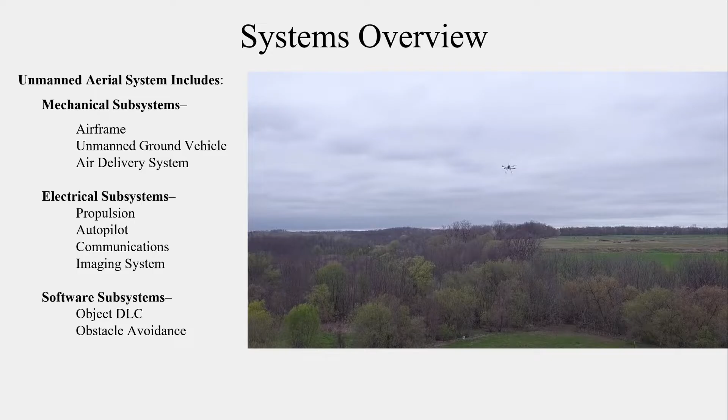For this year's competition, our team chose to create a large XH hybrid frame quadcopter with high-efficiency motors to ensure that we would have enough flight time to complete all mission objectives and land with a power reserve. Our final UAS has a thrust-to-weight ratio of 2.5 to 1 with all systems attached.

For our air delivery, our team created a controlled drop system in order to safely lower the unmanned ground vehicle and payload to the ground. This system used a DC motor and a gearbox controlled by an Arduino Uno to lower the vehicle using a high-strength fishing line.

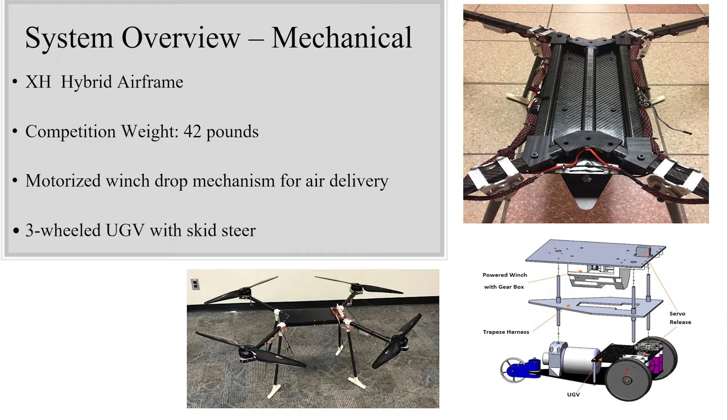For the UGV, our team created a 3-wheeled car that employs differential steering. With this setup, our UGV was able to make precise turns while maintaining a weight within the 48-ounce limit.

On our UAS, there are multiple electrical components needed for proper operation. Our propulsion system uses 4 Tattu 16 amp-hour batteries, outputting 44 volts with a capacity of 32 amp-hours.

This configuration will allow our drone to have a maximum flight time of 45 minutes. The system also uses 4 100 kV motors using 30-inch propellers. The total thrust output of the propulsion system is 93.4 pounds.

We will be using a 2-axis gimbal with a Sony a6000 to take stabilized pictures of ground targets from the UAV. A Ubiquiti Bullet M5 is used on the UAS to communicate images down to the base station.

For telemetry data, a pair of RFD900X radios are used to transmit UAS flight data to the base station. Finally, an FrSky transmitter and receiver are used for the safety pilot controls.

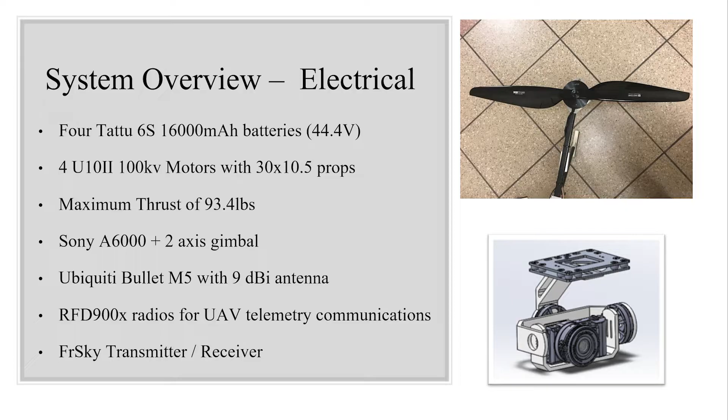This year's Object DLC system is a fine-tuned version of last year's system. Once the images have been received from the aircraft, they are manually classified and submitted to the judge's server using our team's custom web application, codenamed Commander.

The objects are also localized based on the drone's heading relative to north and the target's distance from the center of the image. The obstacle avoidance system uses a ray tracing method processed by an onboard computer to accurately and efficiently plan an avoidance path around obstacles.

Efficiently plan an avoidance path around obstacles. Additionally, users can manually manipulate the flight path if needed before flight.

For our planned mission demonstration tasks, we will be attempting all tasks except autonomous image submission. We are very confident that our system will capture all waypoints during autonomous flight. We are also very confident that our system will successfully complete a payload drop and an autonomous UGV drive.

For our obstacle avoidance system, we are confident that the system will avoid 75% of all obstacles. We will also be attempting manual object DLC and are confident that our system will capture at least 12 of the ground targets.

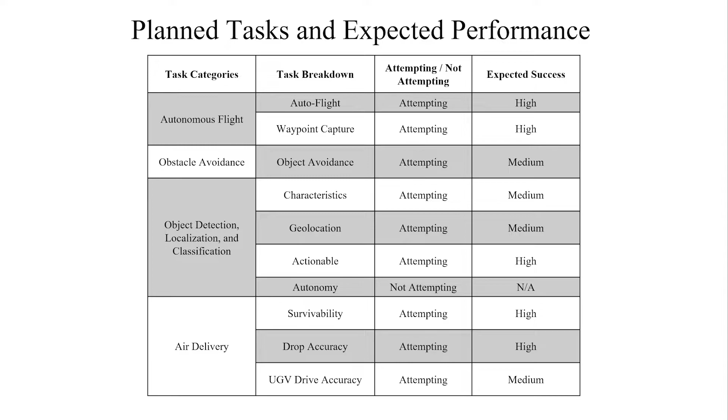To test the performance of the systems on our UAS, our team conducted strength tests and stress simulations on all structural components. Furthermore, all communication systems were range tested to ensure proper operation at long distances.

Before being implemented on our UAS, all software systems were code tested and then tested using our prototype drone. This allowed for debugging before implementation on our main system. Before implementation, all physical systems are prototyped and tested to ensure functionality.

Once the system was airborne, our team used the auto-tune feature in Mission Planner to PID tune the autopilot. After the tuning process was complete, several manual speed tests were conducted to determine if our calculations for optimal flying speed matched with actual data.

From these tests and our calculations, we determined that the optimal flying speed for autonomous flight was 21 miles per hour.

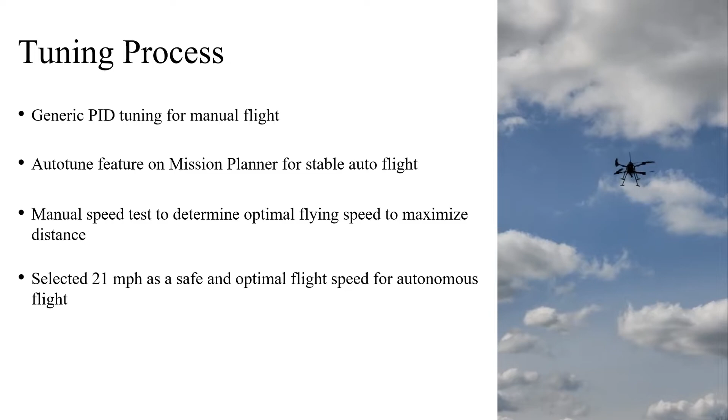For developmental testing of our autonomous flight system, our team conducted 37 autonomous flights using the Pixhawk 2.1 flight controller and HERE2 GNSS GPS on our competition platform.

The autonomous flight system performed well for a large majority of the flights, causing the safety pilot to only take over for 5 of the missions, with the majority of takeovers occurring early in testing. This resulted in an average of 34 seconds of manual flight per autonomous flight.

On the Big Flying Lilac platform, 37 autonomous flights were conducted, with 6 being full mission tests, 10 being air delivery drops, 15 being waypoint capture specific, and 6 specifically to test the obstacle avoidance system.

This resulted in 193 waypoints being attempted, with 187 being hit within 7 feet.

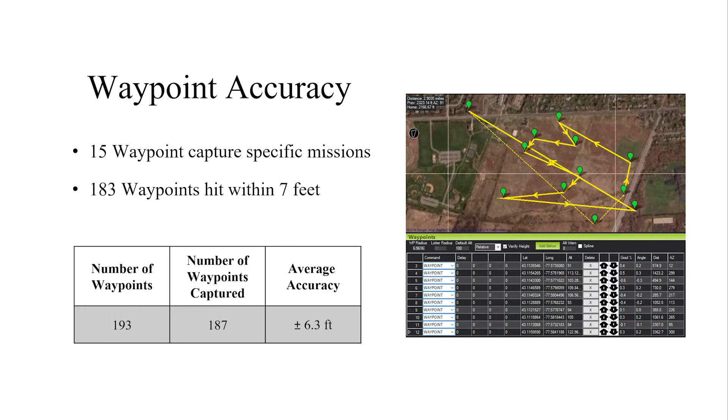For each of the 6 obstacle avoidance specific missions that were conducted, each mission contained 2 obstacles. Additionally, the full mission tests included 4 obstacles each. The total number of obstacles tested against was 36, and our UAS had an avoidance success rate of 77.7%.

To maximize image quality, multiple camera settings were tested while flying the UAS at the cruise speed of 21 miles per hour and at an altitude of 150 feet. The final settings chosen were 1/400th shutter speed, f4 aperture, and ISO 100. After processing the images, the average resolution of the ground targets was measured at 6,800 square pixels.

Since we are not attempting autonomy in the 2019 competition, we instead tested our manual DLC system by feeding images to users who then manually identify and classify ground targets. After initial training, all users were able to operate the manual system with a high success rate.

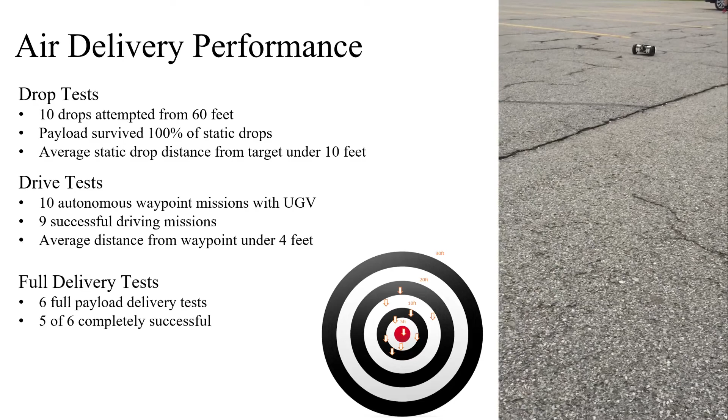For our air delivery system, we broke our testing down into 3 phases: drop tests, driving tests, and full payload delivery tests. We first conducted 10 static drops from 60 feet to test the survivability of our payload. Out of the 10 drops, our payload survived all of the landings.

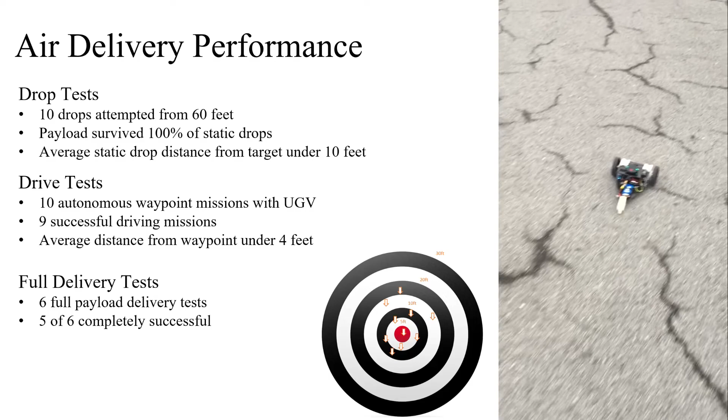We then conducted 10 autonomous driving tests to ensure the accurate waypoint capture of our UGV. Out of the tests, we successfully reached the final destination 9 times with an average distance from the destination of 4 feet. Finally, we conducted 6 full payload delivery missions.

Out of the 6, we were able to land the payload with full success and were able to drive to the target destination 5 times. For each of the full mission tests, our payload landed within 10 feet of the drop location. We feel that the tests conducted accurately model the competition conditions and are confident with our air delivery system.

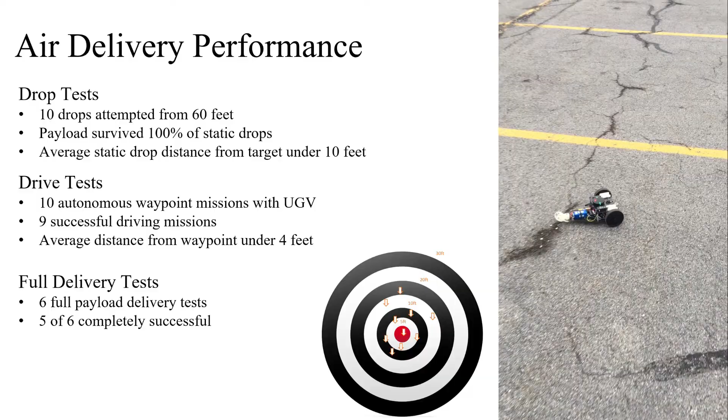Full mission tests were conducted in a fashion that was similar to the 2018 SUAS competition format, with the implementation of the UGV airdrop. Each full mission test included 6 waypoints to capture, 1 air delivery drop with an autonomous mission for the UGV, 4 virtual obstacles, and 5 ground targets. 6 full missions were conducted by our team.

During full mission tests, our team encountered several flaws in our system. These flaws included an initial failure in the UGV's autonomous capabilities and errors in the consistency of the obstacle avoidance code. To correct the UGV error, the team decided to trigger the auto drive using time instead of the UGV's altitude, to eliminate possible false triggers. The obstacle avoidance system will continue to be tweaked to allow for the UAS to more precisely navigate around obstacles.

After conducting our 6 full mission tests, our team used the grading rubric provided to grade each of the missions. For our timeline score, we had an average of 28.2 minutes of flight time with 1.3 minutes of post-processing time. At competition, we hope to have a similar flight time, but eliminate any post-processing time.

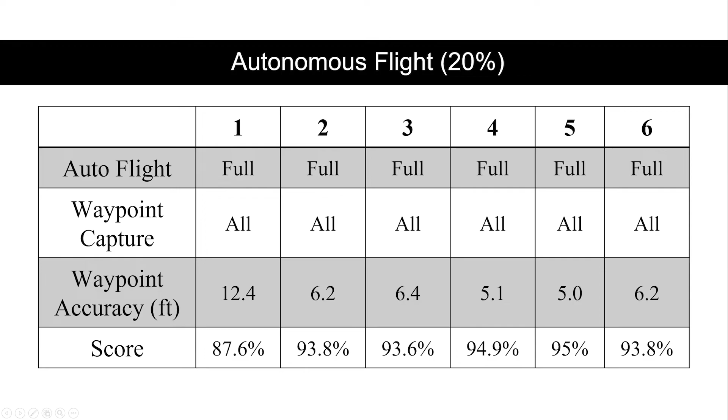For our autonomous flight, our team scored full points for auto flight and waypoint capture. On average, our team scored 93% overall with an average distance from waypoints of 6.8 feet. We expect similar results at competition.

For our obstacle avoidance, our team was able to avoid an average of 3 obstacles per full mission for an average score of 75%. We hope to achieve similar results at competition.

During tests, the team was able to effectively identify most of the objects and classify their characteristics. Our average geolocation error across all tests was 21.5 feet. Our average score was 61.2%, which is similar to our expected score at competition.

For our air delivery, our team was able to accurately drop the payload within 5 feet of the target destination on 5 of the 6 drops. Furthermore, our UGV successfully reached its final destination 5 times within the waypoint's 10-foot range. We hope to achieve full points for air delivery at competition.

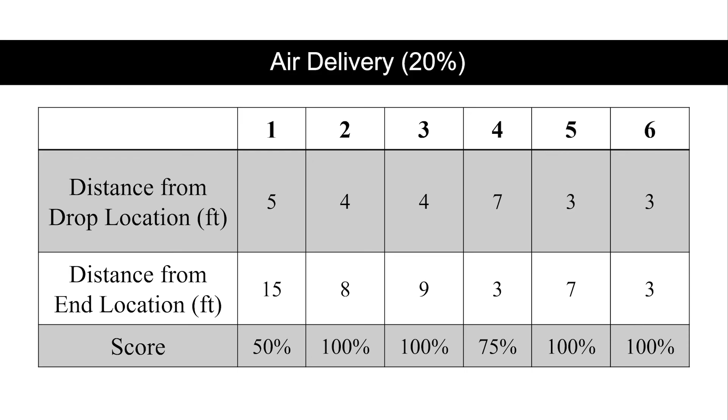We found that our average score across all mission tests was 76.68%. Based on the data collected from this year's full mission tests, our team estimates that our 2019 competition score percentage will be 77%. Our team is confident in our final design of Big Flying Lilac. We hope to represent our university at competition and perform well in the mission demonstration.